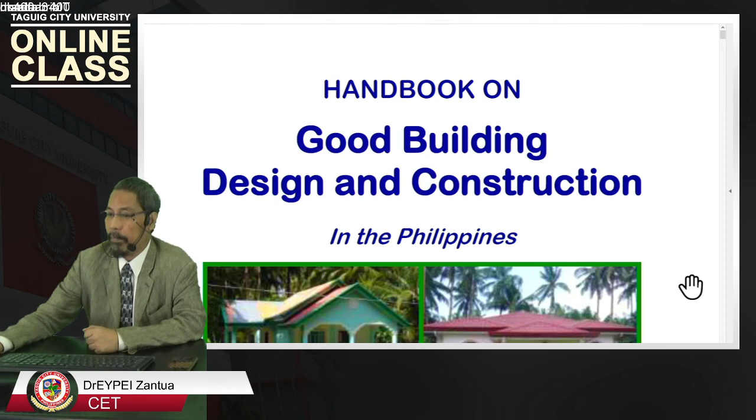Experienced carpenters. Of course, they are not really bad. In fact, they are very experienced in that field, but it is not really thought about or designed in a proper way, and if the residence is good enough, they are oftentimes overdesigned. So we should take a look into this document and present a very current topic about Philippine building design. So let us proceed.

Usually, the majority of our residential units are mainly produced by carpenters, foremen and laborers. They are not thought about or planned. They are not even issued permits sometimes. Much of the time, there's no permit. There's no building permit, no construction permit, no other permit. Just because they are residential, they are the only ones who will suffer if the building collapses.

So in that sense, if the building quality is not good, it is their own pain, their own loss. That's why enforcement is supposed to be done by the government system to enforce the engineering laws of different disciplines. We have the civil engineering law, mechanical engineering law, and electrical engineering law. Those three are the main laws that govern buildings. We also have the plumbing law.

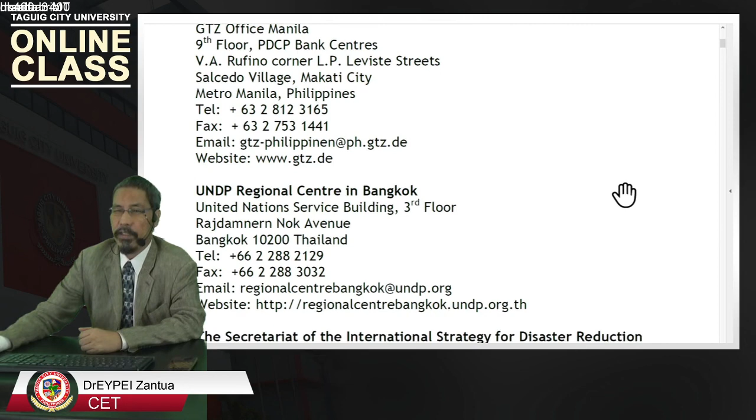This is from funding of the German Technical Cooperation and the United Nations Development Program with the regional center in Bangkok, Thailand, and the International Strategy for Disaster Reduction with their office in Geneva, Switzerland. Their purpose is to provide simple information to house owners, house designers and builders, and building monitors to teach principles of good design and good construction in natural hazard-prone areas.

One of which is actually the Philippines, because we are in the earthquake-prone belt. We are with Taiwan, Indonesia, Malaysia, and Japan as the most earthquake-prone areas.

So also we have natural hazards present in our Philippine environment. So thoroughly studied, they will also guide on whether to repair or rebuild damaged houses. How about those houses which experience some degree of intensity of earthquake? So are we still going to utilize the building, or are we going to rebuild or repair?

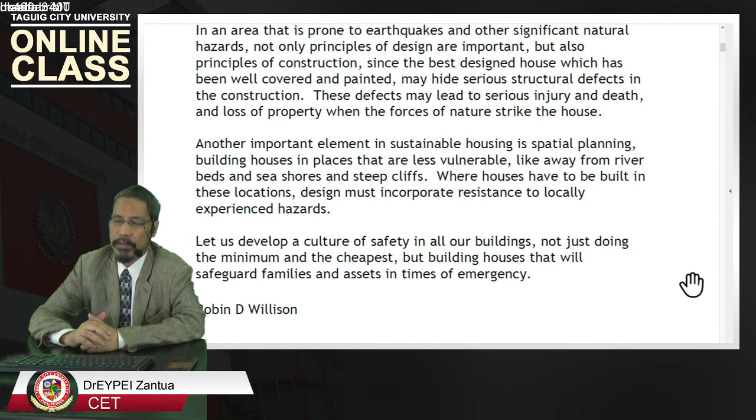Let us develop a culture of safety in our buildings, not just doing the minimum and the cheapest, but building houses that will safeguard families and assets. So this is a word from Robin D. Willison, who actually wrote this handbook. A foreword from the United Nations Development Program with their director, Yiping Zhou.

Okay. It also states the focus on the experience of the Philippines in the course of rebuilding and recovering from the devastation caused by severe flooding and landslide in the past 3 years. So we are always having this periodic, year after year flooding due to typhoons and substantial amount of rains. And how could we cope up? Okay. Is there any hope of coping up with this yearly phenomenon?

As recent events have continued to confirm, disasters upset and negate hard-won development gains. So it's positive development coupled with negative hazard, which happened due to what? Flooding, damaging millions or even billions of properties in a single typhoon or single volcanic eruption.

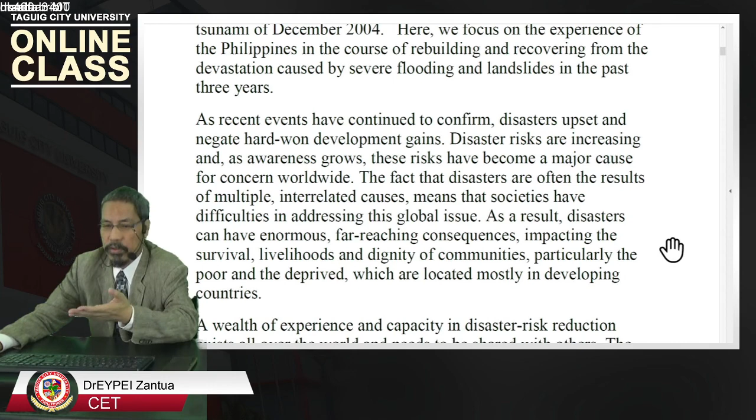Disasters are increasing, and as awareness grows, these risks have become a major cause for concern worldwide. The fact that disasters are often the result of multiple interrelated causes means that societies have difficulties in addressing this global issue. Okay, as a result, disasters can have enormous, far-reaching consequences. We always experience this, in fact, that could change our lives, in countries located mostly in the developing world like us: Indonesia, Vietnam, Laos, Cambodia. So we are similarly situated with respect to that.

And this publication, this document, is a practical guide to design and construction of houses during the reconstruction phase in the aftermath of a disaster. How can we cope up with the repair and reconstruction? So good design knowledge. Okay. The Special Unit for South-South Cooperation supports the sharing of knowledge, expertise, and lessons learned in the past. So these are the background of why we have this advocacy supported by different agencies.

Okay, so specifically, they have the International Strategy for Disaster Reduction. So they already have how to mitigate or lessen the impact of the disaster to the common tao. So also very important, because the Philippines is regularly exposed to climate-related hazards. So let us go further.

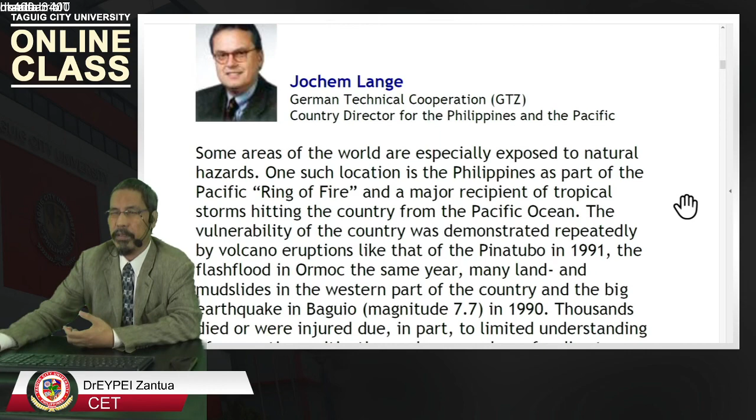One of the proponents also has something to say about the importance of analyzing the hazard carefully. At least some knowledge that we gained in the past, we have to apply in our current situation.

Shelter is a basic human need. A house protects us from climate and animals, and also has a social-cultural role as a center of family life, a manifestation of self-identity. So it is almost a sacred necessity to demand some form of housing unit.

Even as private persons, we are not demanding it from the government, but the government has the responsibility to help us, at least with information, to give us proper guidance on what to know. However, we have this advocacy, which created this book.

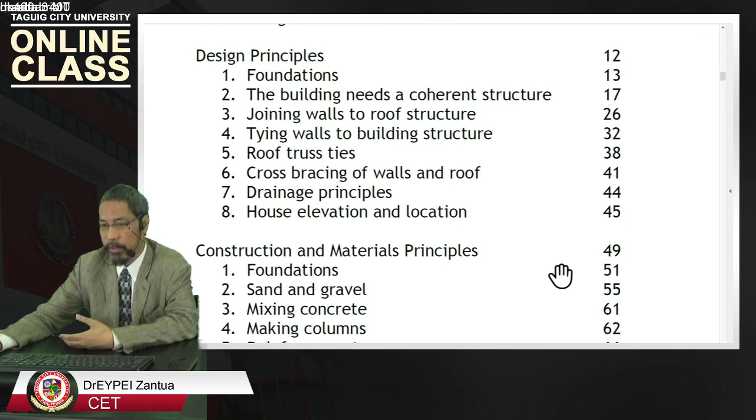So we mainly have design principles, and the other part is construction and materials principles. Let us go to the first part, design principles. What are the concepts we are going to use to meet the cultural, social, physical requirements of residents, to provide safe dwelling, to shelter them from hazards that may impact their environment?

The house must be properly designed, and because of this, the following aspects of a house or structure must be considered in the design.

Firstly, a house must be based on a strong foundation, and therefore this must be given primary attention. Problems with foundations not properly designed lead to unequal settlement. This is a concept we learned in geotechnical engineering. We know how to compute this, we know how to estimate this.

And therefore we give this to the local experts. Cracking of walls and floors and structural weakness are examples of the results of uneven settlement.

So one of the simple ideas is to have a house with a coherent and simple structure so that it could resist outside forces. Not a complex one, simple - like if you put up a single stone, because it is so simple, it is very hard to damage, hard to crack because of its simple structure. So as simple as possible will give us better resistance to forces.

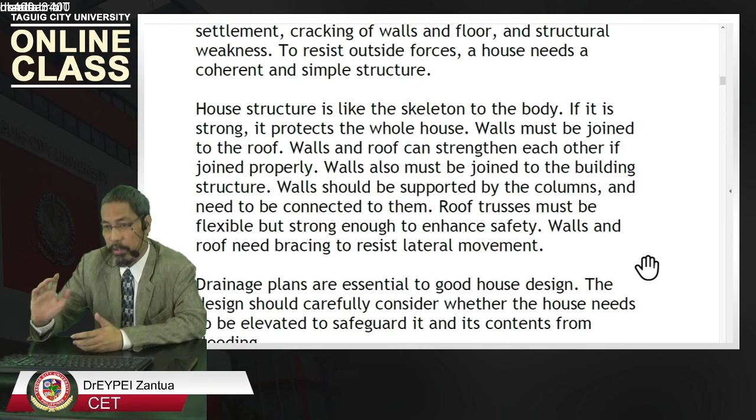So in addition to walls and roof, their main structural elements should need bracing. So we'll go to that - another, the second one, main...

The third one is drainage plans, which are essential to good house design. Drainage is sanitary, to protect us from biological hazards that could lead to sickness and illness. So, drainage plans are essential.

The design should carefully consider whether the house needs to be elevated to safeguard it and its contents from flooding, because floods carry bacteria, and bacteria would expose us to dangers.

So we already gave you three design principles, and let's look at our detailed topics, starting with foundation. So if we can get back to that - that is the first aspect, foundation. Then the second one is house structure. Then the third one is drainage.

So we are now going into deeper details under the foundation. A safe house must have a strong foundation. That is the concept. The ground under the building has to bear the weight of the house. It has to have the soil prepared so that the foundation must be made stronger.

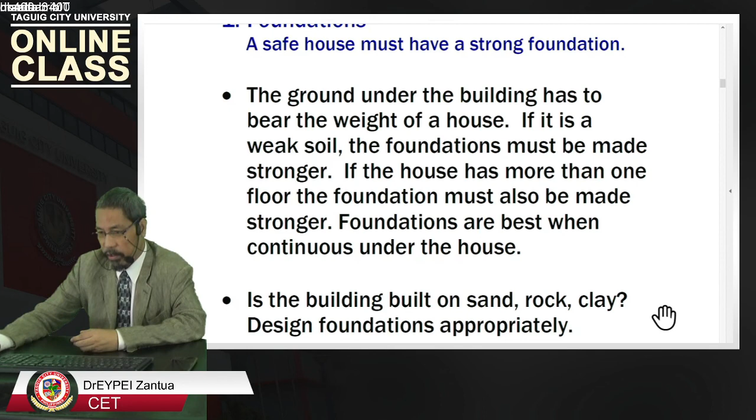Okay? Why? Because as we have said, the house is the load on the soil. So the soil will support the weight of the whole house. So we should be able to prepare the soil for this load. Okay? Foundations are best when continuous under the house.

If they are continuous - because there are foundations that are isolated, but they are best when continuous under the house. There are several types of foundation systems, and one of which, according to our practice and experience, it is best when continuous type of foundations are used.

Is the building built on sand, rock, or clay? So those are the things that we need to see, to observe, look upon during our visual survey of the area - sandy soil, rocky soil, or clay. What is the best type of soil out there?

And if the soil needs to have dumping of appropriate layers of elements like gravel, sand, and so on, we might need additional soil coming out from other areas and delivered to the site, for appropriate design. So we have to estimate soil for a good foundation that can carry the weight of

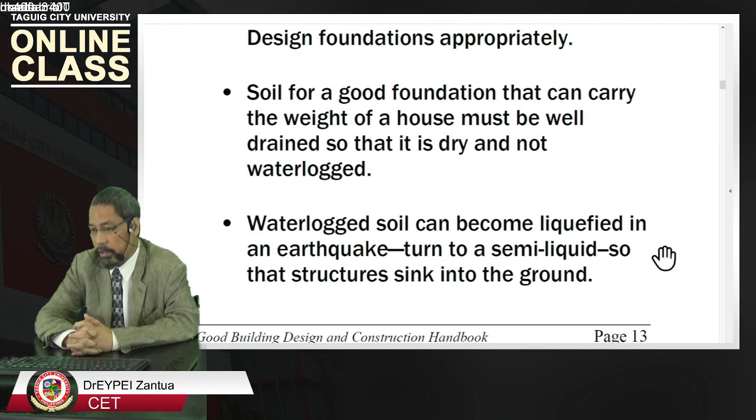And if the soil under your building flows, your building will flow with it, turning to a semi-liquid so that the structure sinks into the ground. So that's a very critical problem. One, two, three, four.

So in here, we are looking at the area, if this is now appropriate for building construction. So it is not. It is not a good example because of bad foundation. This house is being built in a swampy, waterlogged area.

Waterclogged - this is misspelled, spelling's wrong. No? Waterclogged area, okay? So we have water clogging here. So meaning the soil is not prepared.

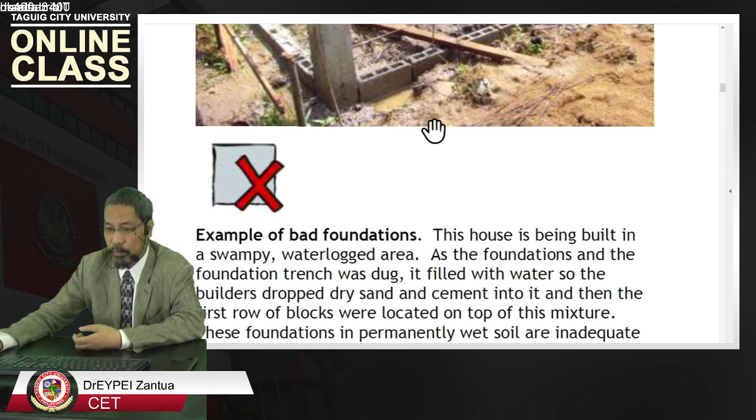will support. If the soil is not good enough to support the building, what will happen? It is really a bad foundation. As the foundation trench was dug, it filled with water, so the builders dropped dry sand and cement into it, and then the first row of blocks were located on top of this mixture.

We usually see this in real life. This is what we see, how laborers and carpenters do it. They do not know. They do not have an idea that they are doing badly in this regard. Okay? Why? Because they just copy their bad experience. That's why.

Number of years of experience is not the question. The question is, how good is your experience? For example, you have 2 years of very good experience against 30 years of bad experience. I may pick the 2 years of good experience rather than 30 years of doing the wrong thing. Having 30 years of doing the wrong thing is not a good experience. Okay? So it is not the longer you work on the field, it is not the longer you work on the construction site - it is how effective your work on the construction site is.

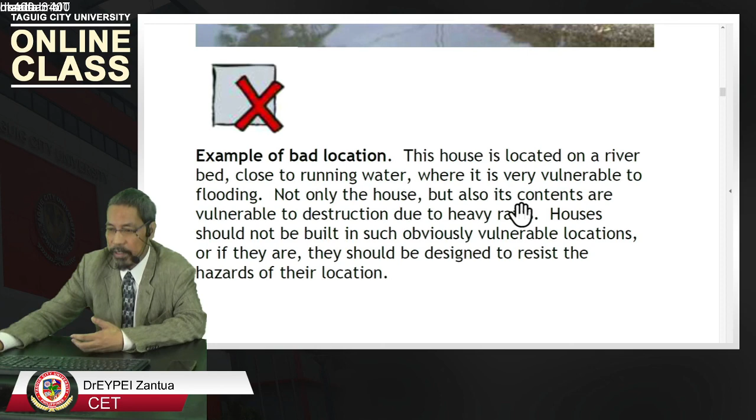Okay? Whatever it is. For example, agricultural produce of how many kabans of rice. For example, 50 kabans of rice is a pricey thing to be damaged by a single flooding. So, it's a painful loss to the owners if that so happens.

Houses should not be built in such obviously vulnerable locations. However, we are always building those types of houses in those types of locations. They should be designed to resist hazard in their location, but on the very first place, we are building our house in that hazardous location.

We could build a house in some areas in the upper portion of the land, outside the reach of water level, the maximum water level, not within reach of a hazardous water level. So, if you have one whole year of experience, or ten whole years of experience within that area, you will have an appropriate knowledge of what is the water level during the dangerous times. And that water level should be your basis in order to select the location of your house.

That's another bad example. The previous one is for foundation, which can be corrected. This one could also be corrected by dumping a sufficient amount of soil before building a house on top of it. Houses should not be built in such obviously vulnerable locations. Okay, and the next one, we have this example.

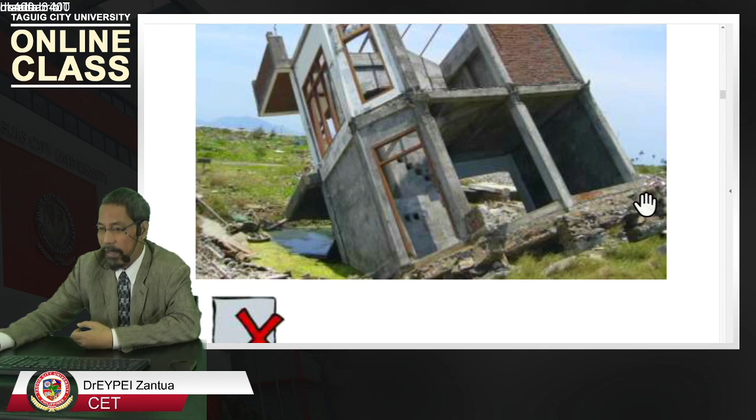In a two-story house or building, this is affected by uneven or unbalanced settlement. That is an obvious result. How can you now correct this? More or less, you cannot repair this anymore. And how much is the loss? All of the materials lost. How can you repair this?

It could be, it is still possible engineering-wise, but the solution might be expensive enough that you would even decide to build a new one.

Liquefaction under the ground, meaning sudden exposure of the underground soil into hazardous earthquake effect. So the foundation suffered from liquefaction, and therefore the ground will be affected, not symmetrical to your building, but unbalanced, and would subside unevenly to the ground. So that's why, for example, only one column was affected by the liquefaction, then it will tilt. Okay, so that's why we have a bad example of number one.

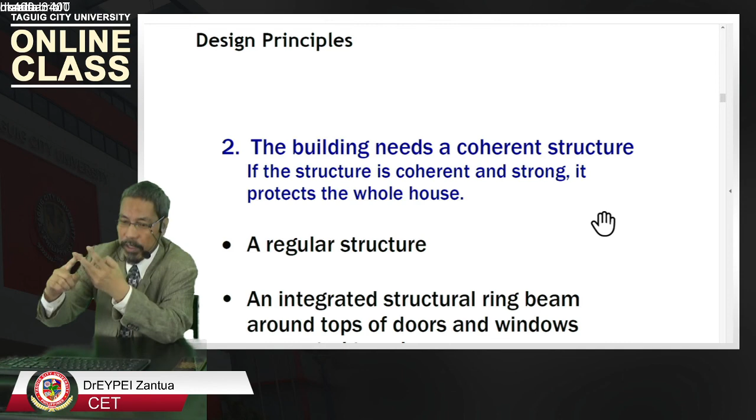Number 2 is coherent structure must be there. Regular structure, integrated structural ring beams around tops of doors and windows connected to columns. So, there must be proper transfer of loading around and among your structural elements. An integrated structural ring beam around top of walls connected to columns. So, beforehand we have doors, windows, now walls. Triangular gable end walls must be structurally supported.

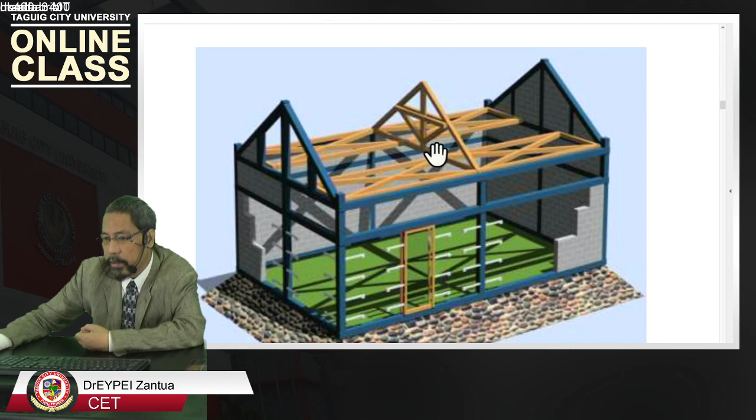Going to the columns, and also the trusses supported by beams. Okay. So, let us take a look. This is also a good structural design. Take note, hollow blocks or brick wall with reinforced concrete structure. So those protruding parts are what we call reinforcement.

A complete structural frame around the building is tied into the foundation. So you will notice that. Tied to the foundation. We have the foundation here. This is what we call tie beam. This tie beam is also a form of foundation, because it is connected to the footings below the surface of the ground. So these are the reinforcement, and the connection, complete, full connection. So good structural design.

The top of the walls is also tied together with the columns, and by a second reinforced concrete ring beam. Okay, so what is this? This is the second reinforced concrete ring beam. This one. This is the first, the second, before we go into the roofing. This would support the doors and the windows also.

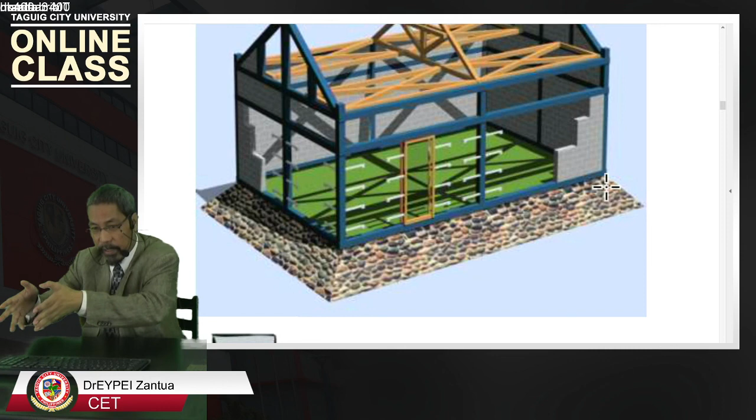Doors and windows have a beam over them to carry the weight of the wall above and to strengthen the columns. That is one way of doing it. Sometimes in the Philippines, we do not utilize this because beams and columns are very expensive. If you recall the previous slide, we have the foundation, which immediately proceeds with hollow blocks. So we are better if we use this tie beam.

And also, above the doors, we have another beam that would support this space. In the Philippines, there is no such type of beam. Almost always, 90% of the time, particularly in residential areas, even in this building, you will not see a beam above the doors or the windows. We are just using lintel in the Philippines.

A complete structural frame around the building is tied to the foundation, the walls, and the roof structure. So, very good. Let's go to the next.

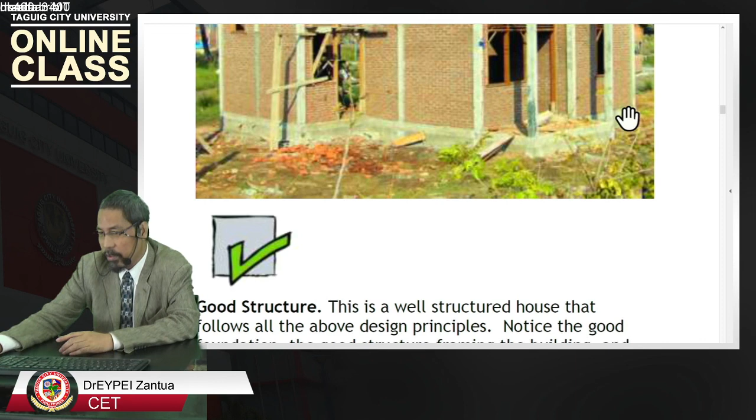Notice the good foundation. This is part of the foundation. These tie beams are part of the foundation. The good structure framing the building and the two ring beams connecting all the building elements at the top of doors and windows and at the top of the walls.

Two ring beams. So we have ring beams here at the top, but this is also a ring beam if you look from above. Even though they are not at the same height, it doesn't matter because they are tied at the column, at different heights. And also take note, they are not substantially apart from each other. They are near each other. So it's still a good design.

It is not as if they are 1 meter apart from each other. That is not good, no? However, in this case, for example, here, this is 1 meter up to that point. This is 1 meter up to that point. That's why he made another beam in between.

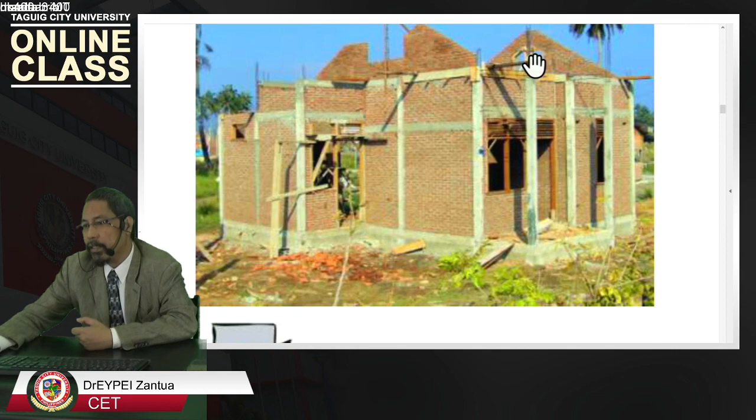Gable end walls are also strengthened with reinforced concrete. So here we can see this is going to be gable, that is reinforced concrete, gable roof. So we have steel reinforcement like this. Okay. So we also notice that. So that is necessary.

It will not be damaged like this one. This will be damaged one panel, one wall at a time. However, this will be damaged completely. This will be completely shattered because they are dependent on each other. If this part is damaged, all of the upper part will be damaged.

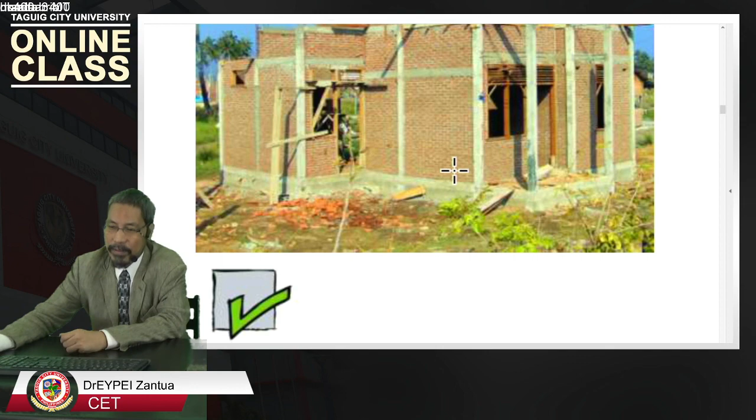It is not the same. If we take a look at here, if this part is damaged, all of the upper part is not damaged because they are connected to the beam and column. Only that small part will be damaged. That is the difference. So take note of that.

Actually, they are not poured. Maybe they are just made up by throwing the mixture of sand, gravel, and cement after the walls were built up, because this is a common issue with carpenters and laborers, because we would like to minimize the cost of building a form. So you have to build a form before you can pour the mixture of concrete.

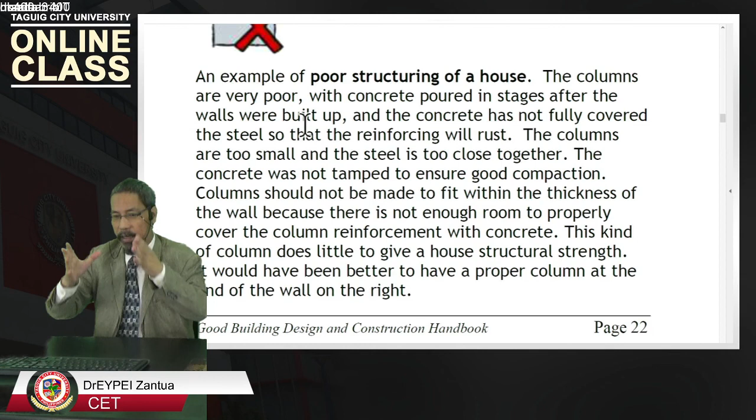Not just on the issue of money, but on the issue of the complicated job that must be done in forming complicated forms. You don't have to form complicated forms like this one, because you just need one plate inside and one plate outside, then pour, because in between there are hollow blocks. And look at the hollow blocks like this. It's not a properly made up wall.

It's not fully covered the steel, so the reinforcing will rust. The columns are too small and the steel is too close together. Take note, the steel are too close together. It's not good practice, okay? The steel should be farther away from the center of the column. That is a main principle. Okay?

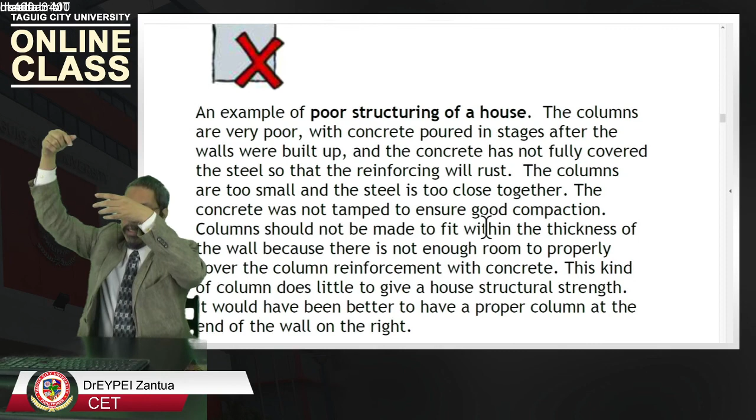The concrete was not tamped to ensure good compaction. So tamping: after pouring in the mixture of concrete, while it is still wet, you have to tamp it by a small stick, long but small stick, so that we can avoid bubbles. Okay? Bubbles. There are the trapped air bubbles inside that created those bad column structure.

Columns should not be made to fit within the thickness of the wall because there is not enough room to properly cover the column reinforcement with concrete. Okay. Columns should not be made to fit within the thickness of the wall. Okay. So, it is just what? Rushing of work. So maybe the foreman or the carpenter is not aware, or if he is aware, he still does it in order to avoid what? Long period of work. Okay?

This kind of column does little to give a house structural strength. It would have been better to have a proper column at the end of the wall on the right. Okay? The end of the wall here, this one. You should have a column here rather than here. So it's not proper. It's not properly designed.

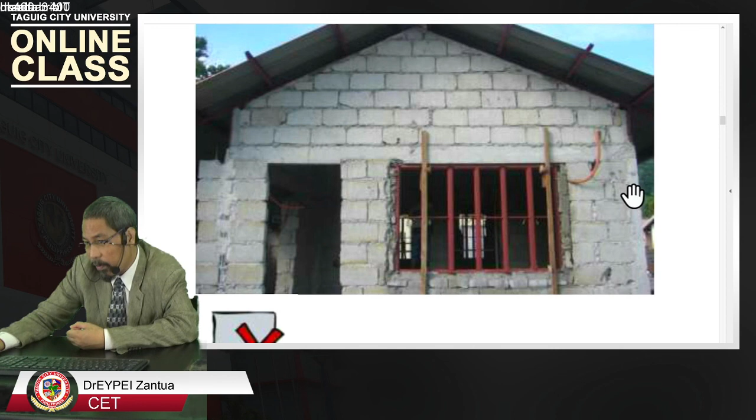Almost similar. Small column, but another one. The column here is not sufficient. Not sufficient. We need column here. Okay to have beam here, but there is no connection. This is just a lintel again. This is the practice, normal practice in the Philippines. This is not good structure.

Another example of house which has too little structure to brace the wall against lateral forces. This is a common construction fault with hollow blocks. Columns are inadequate, too small and poorly constructed, and there should be a reinforced column between the door and the window. So here, we might have some column here or here. Because if we do not have, they will fall at the same time. That's the reason.

The window and the door have inadequate structural support. When the forces of nature strike this house, it will progressively deteriorate and be hard to repair. It is harder to repair.

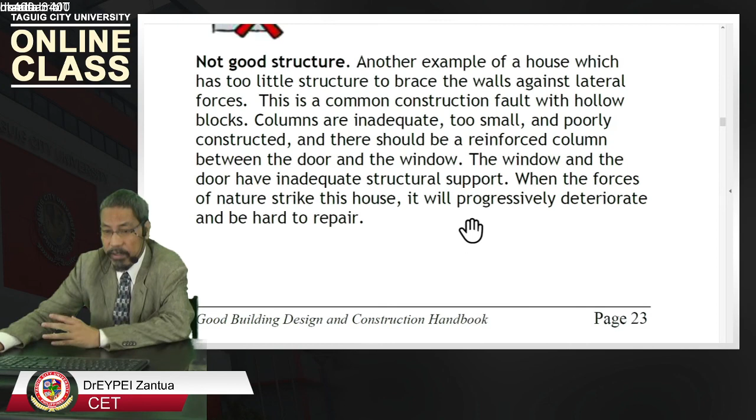A good pattern of reinforced concrete columns and beams to strengthen all aspects of the building, including support to strengthen the triangular gable wall, end wall, so that it will not fall when the lateral force strikes the building. That is usually the weakest point. They will fall down. So structurally supported with beam here, with beam here.

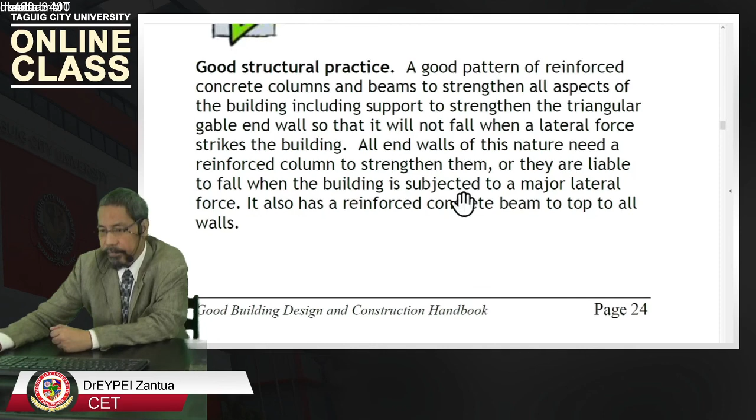All end walls of this nature need a reinforced column to strengthen them, or they are liable to fall when the building is subjected to a major lateral force. It also has a reinforced concrete beam to tie all walls. Okay, so that is good. So we have beam here, actually we have beam here. Complete. Completely okay. A good structural practice.

Connection of wood frame building to concrete frame or brick stub walls. So this type of connection, on our timber design. Steel framing, steel bracket that could be used to support our columns and become a what? Footings, foundation. Okay, so that is what supports our stub walls.

It is essential that a wood frame structure mounted on a concrete frame brick stub wall must be fully anchored together. So, fully anchored. So have a full anchorage here. So, letter Y and footings. Steel bracket. Okay? So, because this is a timber, we are going to have a bolted timber system. Okay?

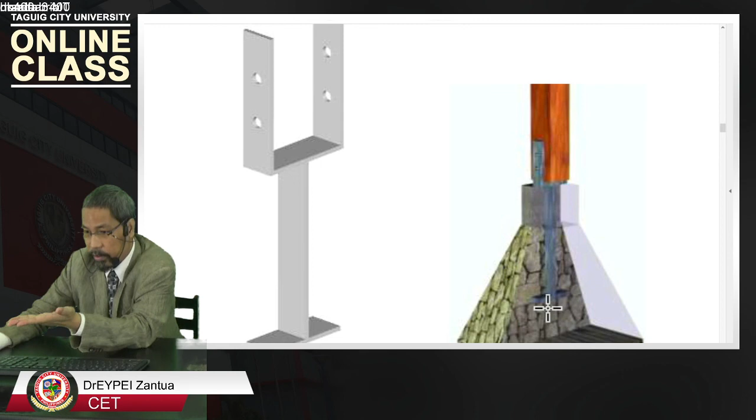So this will support the wall, meaning the wall will transfer the load to this column, and this column will transfer the load to the earth by this foundation. And this is obvious that this will happen. It's obvious, okay? So it is a good sample.

Design principles, number 3. Joining walls to roof structure, join walls to each other. Column reinforcement should protrude from top of concrete columns and be bent around roof trusses for structural strength. So the reinforcement should be bent around and be strengthened. Or roof trusses should be strapped with metal ties to the wall structure. It could be strapped or bent around. Okay? Strap. So strapping with the metal ties to the wall structure.

Okay? Exposed metal from the column should protrude from it. So that is for what? For stronger connection. For what? Complete transfer of load from trusses, roofings to the column. Exposed metal should be painted with rust-proof paint to prevent corrosion. So because of the bent exposed metal, you have to give some painting to avoid immediate corrosion.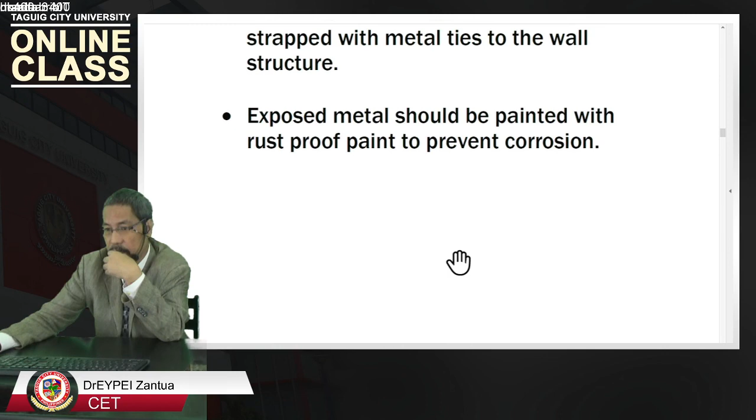Okay, let us go to the picture example. So this is what we call a strap. So these trusses are strapped. So this one member of truss is connected to the other member of truss. So they are stable enough because they form the basic stable geometric configuration, which is triangle, and strapped to the column. And this beam has a protrusion to be connected to the succeeding element. Also this one, okay?

Illustration of binding roof trusses to building structure. Roof trusses should be constructed over columns, and for a concrete column, the reinforcement should protrude at the top and be bent over to join the roof structure with the walls. So, metal straps. Metal straps is the alternative way of doing it. Metal straps or plates can be used for this role, particularly where building structure is made of wood. So that's why they are looking like that, no?

Made of wood. Another example, bent. The reinforced protrusions are bent over. So with what? Bracket. Okay? With bracket here, in joining the truss elements. So good example, roofing sample. Reinforcement bent over roof truss to tie house structure to the roof structure. This is an essential detail in areas subject to earthquake and winds to keep the roof on the house when the natural hazard strikes the structure.

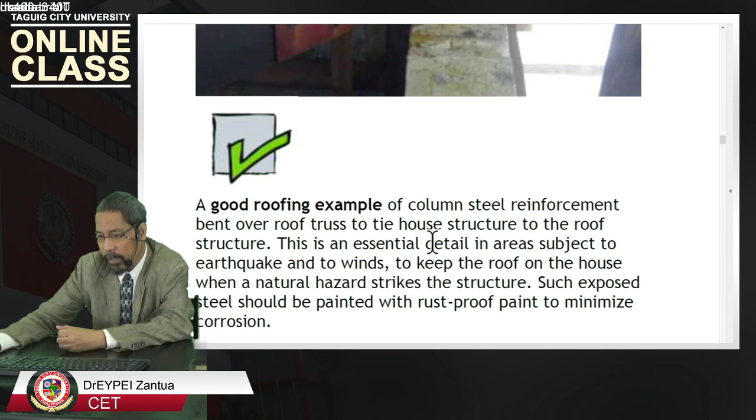Such exposed steel should be painted with rust-proof paint to minimize corrosion. That's why you are now looking at some of the rusting. So immediately paint it with enamel painting for initial paint protection.

Another example we have here, steel trusses connected to concrete beams and columns. So what did they do? What did they do? They have protruding reinforcement. I do not see the bending, but they have a good protruding reinforcement. Good roofing practice, steel roof trusses are connected to columns through welding. Welded. I did not see the welding. No? So welded connection of truss members to column reinforcing steel. And purlins are welded with ties to roof trusses.

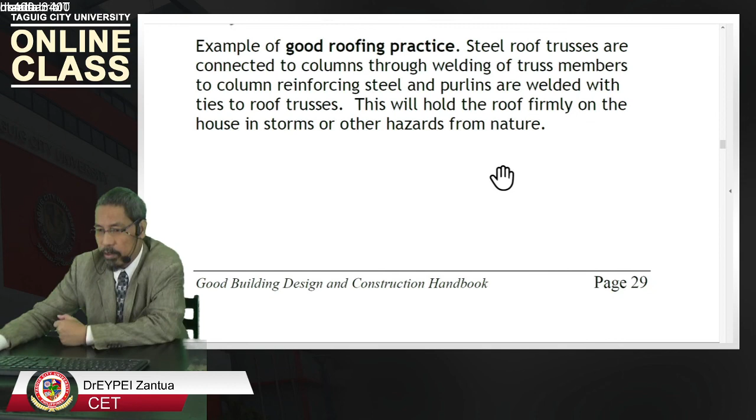Okay. So welding by welding technology. So that's one. Welded. Okay. This will hold the roof firmly on the house in storms or other hazards from nature.

Next picture, we have a connection. So there is no bending. Why? Why there is no bending? So this is incorrect roofing practice. There is no bending or protrusion of reinforcement between the roof and the building structure. The roof is resting on the top, so it could easily be blown away by strong winds, subject to moving with high winds and other forces of nature. So it's not a good principle.

So another design principle, which became number 4 here, tying walls to building structure: walls tied to columns protect them from falling. Tie the walls to building structure. Okay? Walls tied to columns protect them from falling. Walls must be tied so they do not move separately when the forces of nature impact them. Wall ties should be hooked into the wall structure.

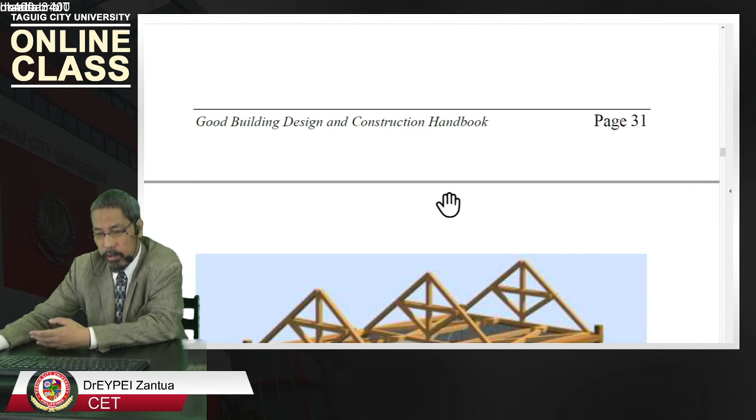Hook. Hook looks like this. Okay? Hook. So we have like this, a small hook. Okay? There are small hooks there. Okay? So good tying practice and illustration for a wood frame building where metal ties are used to tie wall materials to the main structure of the building.

The steel wall ties are to be at maximum of 40 centimeter spacing. Maximum. So the distance of this one to this one, that is what he is talking about. Maximum of 40 centimeters. So 40 centimeters is about 1.5 feet. Less than 1.5 feet. Okay.

Okay. So we have the same. They are the same. They are the same.

40 centimeter. Reinforced where metal ties are used to tie the walls. Steel wall ties are to be maximum 40 centimeter, a minimum of 8 mm diameter. So the size is 8 mm, and bent at the end. They are for all openings in the walls. So 8 mm minimum. That is used in the Philippines.

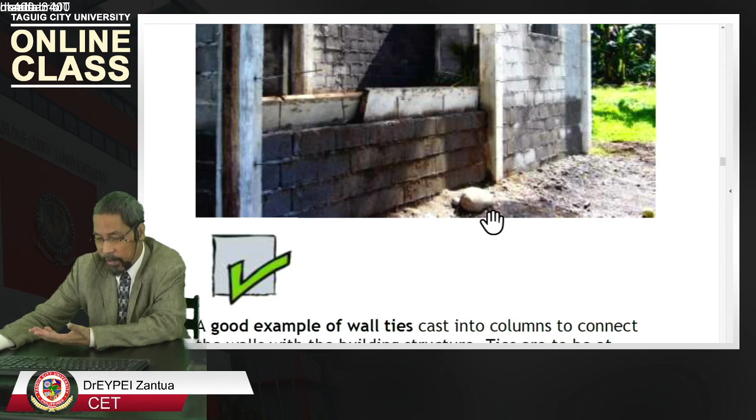So this distance from this point to this point to this point, maximum 40 centimeters. And they are sized number 8, or 8 mm rather. Good example of wall ties. Yeah, wall ties. So these are the wall ties. So wall ties, okay.

Cast into columns to connect the walls with the building structure. Ties are to be at maximum, again, from bottom to top of the wall. However, in this illustration, they lack hooks at the ends at this point in construction. So, there should be a hook shape. Okay? Like this, small hook. Small hook shape. Okay? So, we do not see a hook shape here.

Okay, so also top or bottom. This 1, 2, 3, 4. Okay. We should also have above going down. Okay. So to top of the wall. From bottom to top of the wall. Okay, going up. Must be connected there.

And okay, what happened here? Result of no ties. Okay, so the wall and column just separate. The beam and the wall just separate. Yeah, there is no connection between the wall and the beam. They just separate.

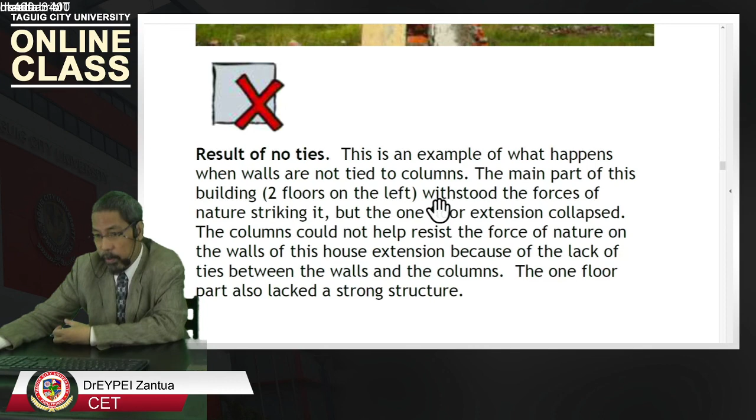Okay? The main parts of this building withstood the forces of nature striking it, but the one floor extension collapsed. Okay? So the extension, wall extension collapsed. Okay? The columns could not help resist the force of nature on the walls for this house extension because of the lack of ties between the walls and columns.

The one floor part also lacked the strong structure. So it's not a good practice. You can see there is no reinforcement in between connecting the column to the wall. So we have the reinforcement shown here, but there is no connection from the wall. So they just separate from each other. Result of lack of ties.

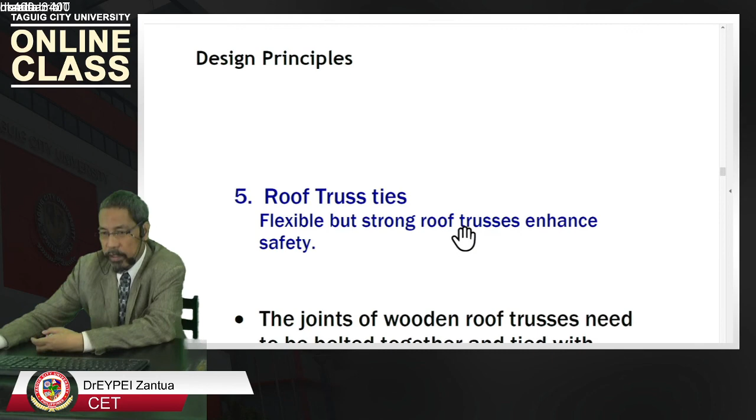Design principle number 5. Roof truss ties are also needed to enhance safety. Joints of wooden roof truss need to be bolted together and tied with metal straps to provide flexibility but not collapse under the forces of nature. Metal roof trusses must be welded together, welded to purlins and welded to wall reinforcement for strength. Okay? So that is the difference between wooden and metal. Okay?

Welding technology and bolts. Okay? So it's easier for welding, but the technology needs what? Equipment, welding equipment, and skill and power source. Okay. However, for wood, we just need to prepare bolts and holes, okay, and metal straps. Okay. So let us take a look. So wood, bolts, and metal straps like this, brackets. Okay, good.

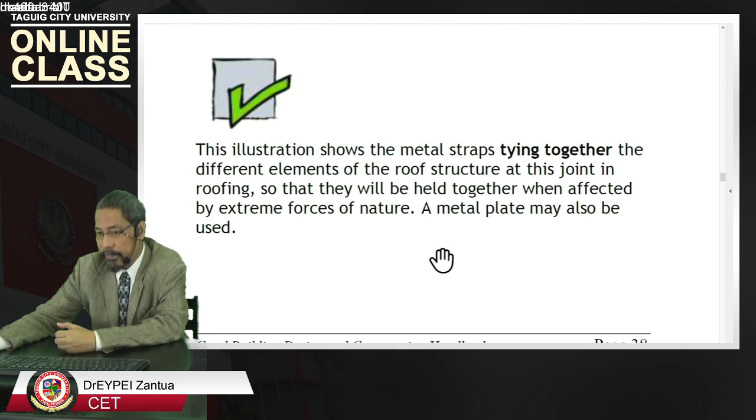Straps tying together the different elements of the roof structure and at this joint in roofing so that they will be held together when affected by extreme forces of nature. It could be a metal plate like this, a triangular metal plate could be used like this. Also, a triangular metal plate could be like this. Okay. Also here, a triangular metal plate could be used like this. Also in here, also in here.

So, another illustration of a good joining practice. Notice that for a wooden roof structure, wooden blocks should be used for support of purlins, not a single nail through the purlins into the truss. Okay. It's better to have that kind of support using wooden blocks rather than nailing. But, however, the natural and normal practice in the Philippines, again, is through nails. Okay? That is a carpenter and laborer type of experience.

No? Strap, plate across joint. Okay? Okay. So, there are no nails. Just bolts, no? You have bolts, pins, or even nails passing through this metal strap or plate.

How about steel connection? There is so much welding. The roof is strongly connected to the reinforcing wall by welding, and the purlins are welded to the roof trusses.

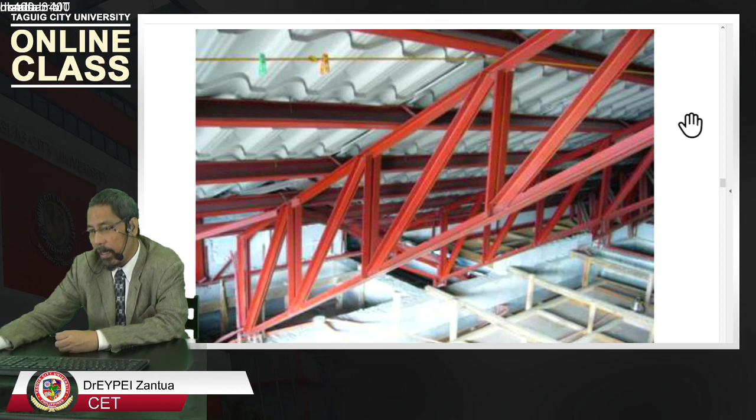So what are the purlins? These are the purlins, welded here to the roof trusses with small U-type brackets made up of reinforcing bars, to make a strong roof structure.

Principle number 6: cross-bracing of walls and roof. We need cross-bracing to avoid being susceptible to lateral damage. In order to resist lateral forces, walls and roof structures need cross-bracing at all levels, particularly if it is a wooden structure. This is a major principle in construction of traditional houses. If it is concrete, the concrete blocks themselves form the cross bracing.

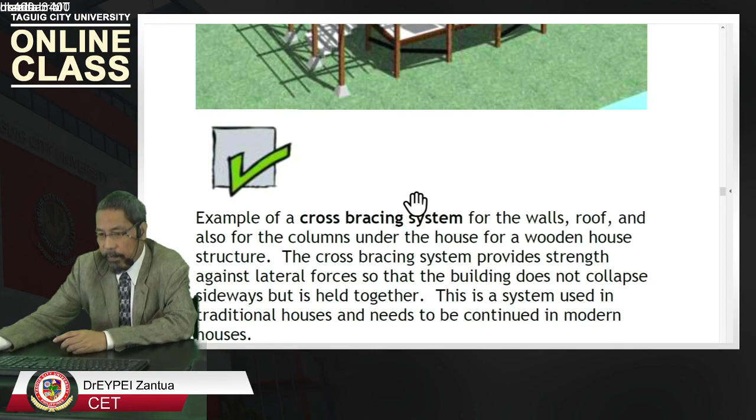Example of cross bracing system for walls and roof. Cross bracing one, another cross, a full cross, one diagonal which is also called the cross. Another cross bracing here, another cross bracing here. Take note of the formation of the cross bracing - this one, this one, this one. So those are the types of cross bracing.

Minimum, but effective. So for columns, walls, roof, under the house for a wooden structure, the cross-bracing system provides strength against lateral forces. This is a system used in traditional houses and needs to be continued in modern houses.

What is this? This is an old house, I think in the northern part of the Philippines. So we have what? It's very hard to believe that this will survive. Maybe it is a very thick wall, so it may survive - but there is no bracing.

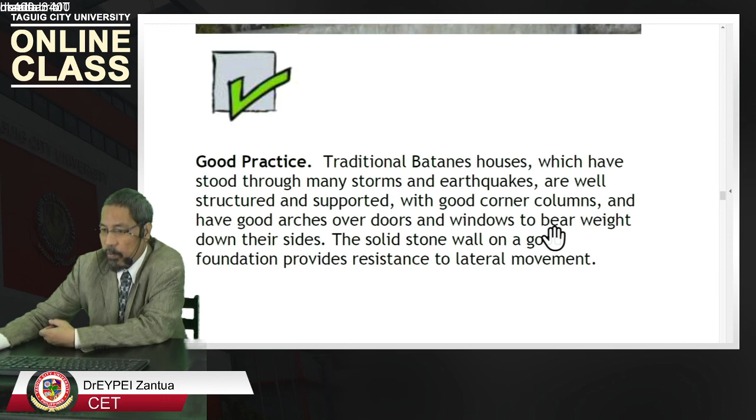And they have good arches over doors and windows to bear weight down their sides. There is no beam, but the arch provides the transfer of load from horizontal to vertical. That is the function of an arch - it provides the connection, the transfer of loading. That's why it is still good.

This is good - a solid stone wall on a good foundation provides resistance. That's why, because of foundation and structure, even the stone wall is enough. And it is not just maybe, because these houses already are tested for a long period of time - they are still there through many typhoons.

Okay, number 7, we are nearing the end of the document. Drainage principle - that is the last topic. Drainage plans are essential to good use. A high rainfall area requires a drainage plan for roof water to a common drain.

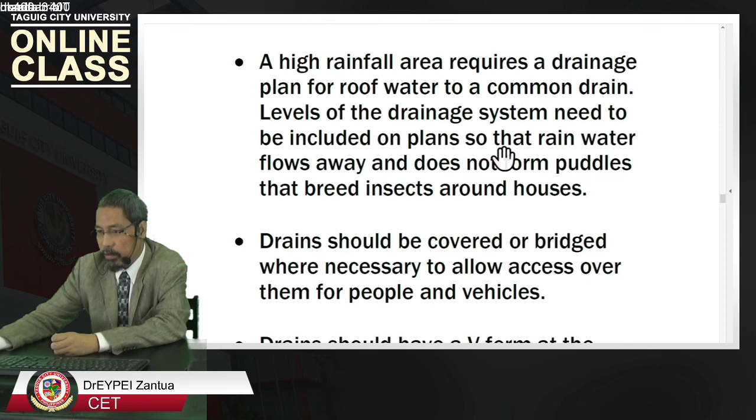So there must be a proper assessment of how the water should flow. Levels of the drainage system need to be included in the plan so that rainwater flows away and does not form puddles near the foundation, which bred insects - another health hazard, biological, from houses, so sanitary in nature.

That's why drainage is under sanitary or plumbing, because plumbing is an essential part of structure. What are the very simple essential parts? Structural, plumbing, electrical - those three are the most essential parts. With just those three, we can build a simple basic house.

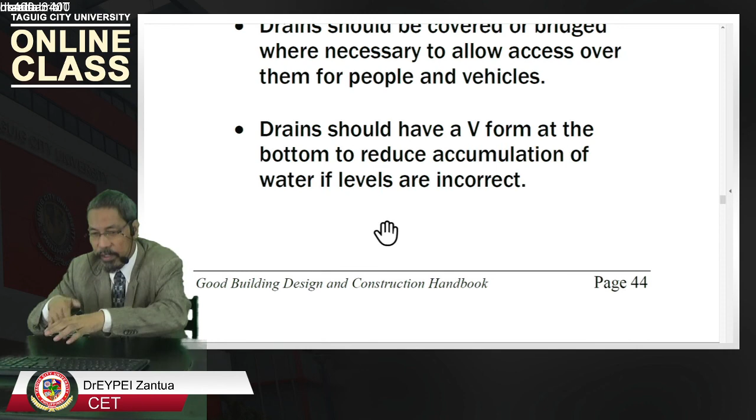Drains should be covered or bridged where necessary to allow access over them for people and vehicles, so there should be a pathway for people not to step on the drain system every day. Drains should have a V form at the bottom to reduce accumulation of water if levels are incorrect - a V type of canal.

Design principles: house elevation and location safeguards house and contents from flooding, landslide, and floods. Selection of location: the house floor should be elevated above the surrounding ground level, and extra height is needed in vulnerable situations such as location close to a floodable waterway or swampy area, or in a tsunami or wave-prone area near the sea.

Extra height is best provided through stilts, so bamboo stilts is okay. We can see on the pictures.

Houses must be located away from places subject to landslide, where soil may move down a steep slope, and debris flows where soil, gravel, and rocks may be washed rapidly down by heavy rainfall plus floods.

Okay, let's take a look. In a swampy area, we need to have a first floor above the ground level. That's why we have footings here, and they are constructing the floor beam. So the floor is going to be about 1 meter above the ground.

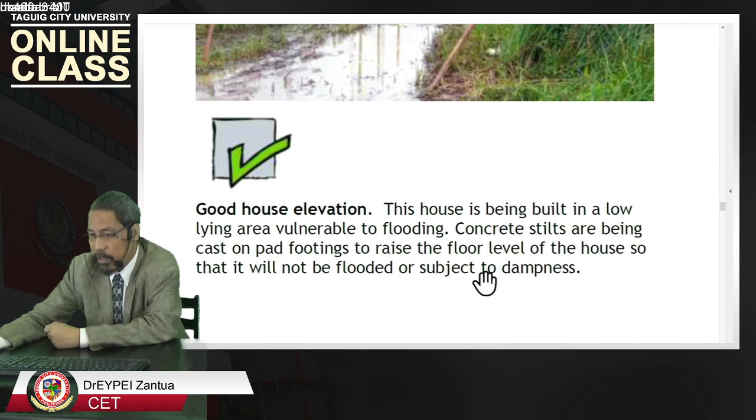House elevation. This house is being built in a low-lying area, vulnerable to flooding. That's why concrete stilts are being cast on pad footings to raise the floor level of the house so that it will not be flooded or subjected to dampness. So these are the concrete stilts.

So casted on footings, pad type of footings, individual type. But we also have floor beam. It's enough to support because there is only one, about or less than 1 meter. So that is enough.

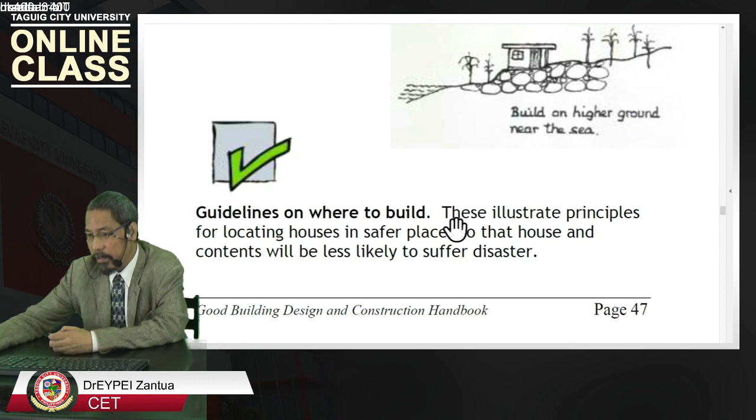Guidelines on where to build. This illustrates principles for locating houses in safer places so that the house and contents will be less likely to suffer disaster. Here's another picture, in landslide areas.

Over riverbeds or irrigation ditches, you have to provide a strong column. Over sanitary waste, landfills, or construction clearings, you have to do it with a deep type of foundation.

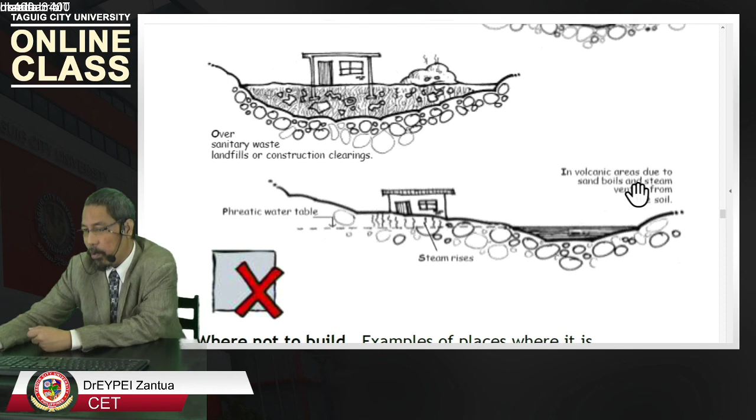Phreatic water table - so we have the phreatic water table here, and steam rises, so it's not good. In volcanic areas, due to sand boils and steam venting from the soil, it's not good, we are not to build there.

Sample of places where it is dangerous and where it is not dangerous to build, where houses may easily be destroyed. So that's why you should not proceed like this - you are within the maximum, you are here, this may erode, the soil is not stable.

That is why those are construction principles and materials. So we are now on this part: a building may incorporate all good design principles, and yet the way it is constructed may lead to its failure when the forces of nature are applied to it. This section explains good construction methods and principles for choosing good materials for construction.

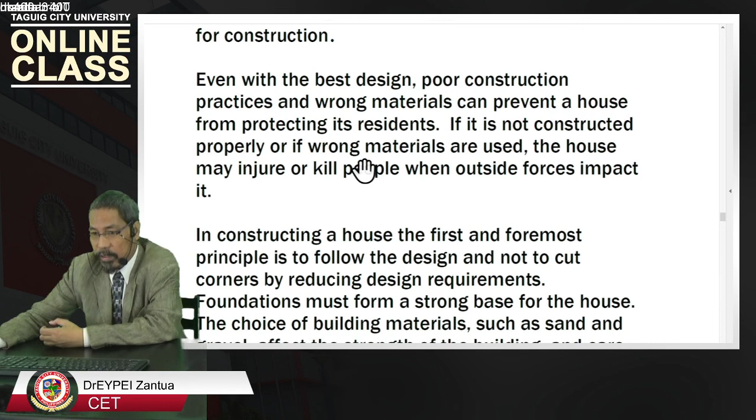Even with the best design, poor construction practices and wrong materials can prevent the house from protecting its residents. If it is not constructed properly or wrong materials are used, the house may injure or kill people when outside forces impact it.

In constructing a house, the first and foremost principle is to follow the design and not cut corners by reducing design requirements. That is happening all the time. The choice of building materials such as sand and gravel affects the strength of the building, and care must be taken to choose the best materials.

Mixing good, clean ingredients with little water makes strong concrete. Wrong ingredients seriously weaken concrete. Strong columns provide strength to the structure, forming part of the principle to use the best materials in order to keep everything and everyone safe. A strong roof provides lasting weather protection, and tying walls to the structure strengthens them from collapse in an emergency.

Wells and septic tanks are essential health-supporting components for the plumbing and sanitary system of a house, and therefore must be planned wisely. You have to place those at a distance from other water sources and the septic tank. The foundation material principle must be founded on solid ground.

Only broken rock should be used in the foundation, not unbroken, rounded river stones. Because they are broken, they are not slippery - they pose sufficient friction.

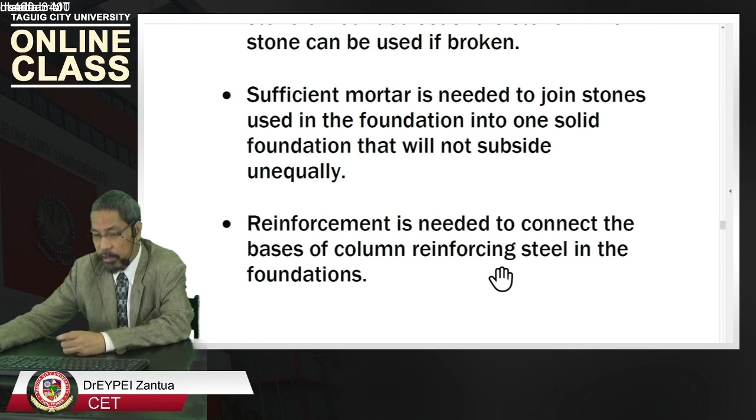Reinforcement is needed to connect the bases of columns, using reinforcing steel in the foundation. There must be a connection from the foundation and footings to the column itself, because of the need to transfer the load more efficiently from the column to the ground.

Good material for foundation is broken rock, rather than unbroken rocks. This material is of a harder rock or sufficiently large size so that rocks will not slip between each other, providing sufficient friction. If it is properly laid and properly cemented with the column starter concreted into it, it will make a good foundation.

Poor material for foundation includes round river or beach rocks, which do not pose as much friction with each other because they are liable to slip between one another, causing them to settle unevenly.

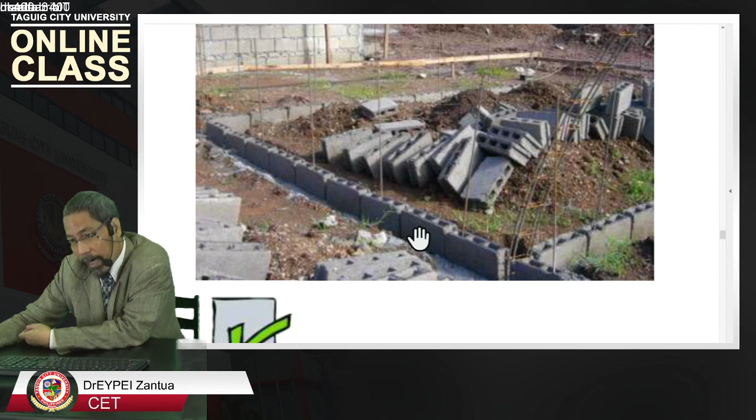Let us go to the next foundation - a good concrete foundation, below the hollow blocks, with reinforcement. These houses have been constructed in a dry trench, so there is no flooding and no clogged water.

Using good material, the first row of blocks was laid while the concrete was still wet. Starter bars to reinforce the hollow block walls are inserted while the concrete is wet, giving us the footings and wall hollow blocks.

Regarding construction sand and gravel: coral sand should never be used in any construction. Coarse sand should be sieved to remove stones, fine particles, and dust, following a design range of sand size.

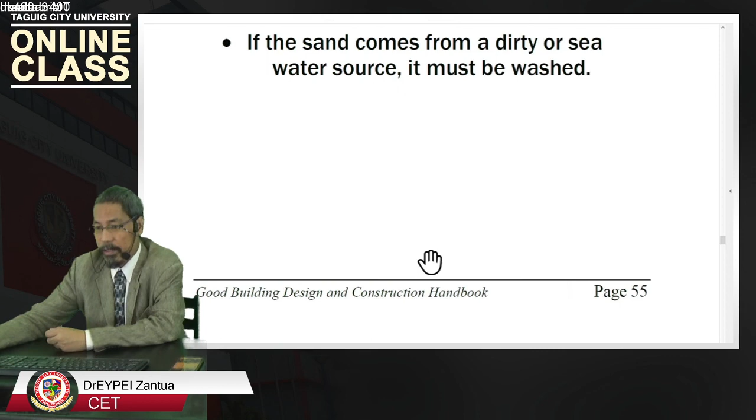Good quality sand is all of about the same coarse texture and does not have larger stones in it or a lot of dust.

Sand can be tested by lifting up a handful and letting it fall back to the ground. If a significant portion of it blows away instead of falling straight down, it has too much dust and needs to be sieved - that is how we do it in the construction site.

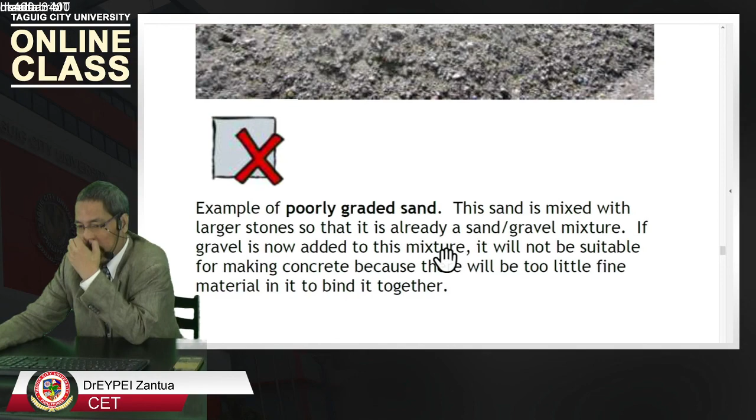Here is an example of poorly graded sand - a mixture of small stone and sand, mixed with large stone so it is already a sand-gravel mixture. If gravel is now added to this mixture, it will not be suitable for making concrete because there will be too little fine material to bind it together, so it will not properly provide the correct proportion since it is already mixed up with the sand.

Okay. Bad practice for materials. Debris should not be allowed to be mixed with any of the ingredients for making concrete. Such debris seriously weakens the strength of the concrete. This sand will need to be cleaned before it is used for mixing into concrete. So there are what? Waste, garbage with the sand.

So plastic, leaves, grass, roots, shells, and other debris must be removed before using sand or gravel for making concrete. Harmful debris, particularly in concrete when it is mixed by hand on the ground. Gravel is best made up of crushed rock, not of river rounded stone. So crushed rock. Okay.

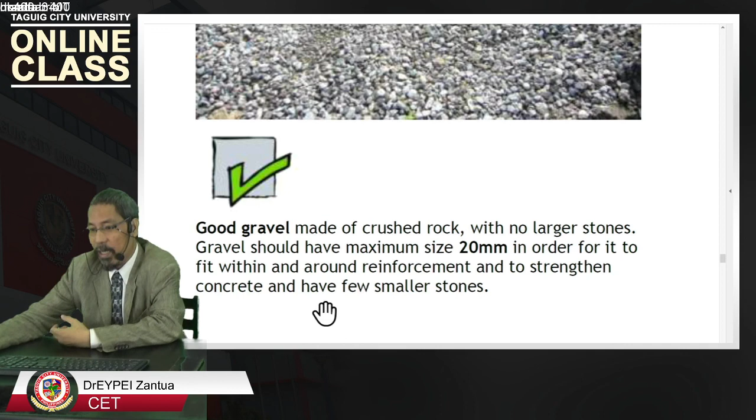So about maximum 20 mm is good. 20 mm is good, in order for it to fit within and around the reinforcement and to strengthen concrete and have few smaller stones. It's a good choice of size. Up to 25 mm can be done, but a good one is 20.

Mixing of concrete: good clean ingredients with limited water makes strong concrete. Ensure adequate cement is added, mix ingredients well, limit water, and use only clean water. Concrete should stand up when mixed, not flow away due to excessive water. Do not use any water that is salty. This destroys the concrete strength.

Do not use seawater. Use only properly selected clean ingredients. Because of what? Because of the amount of salt that would prevent the proper bonding. Okay? This destroys concrete strength. Okay?

Making columns. Strong columns provide strength to the building. All reinforced concrete columns should be made in one part before walls are built. They should not be made in small steps as walls are built. They should contain bars for wall ties and ring beams when constructed.

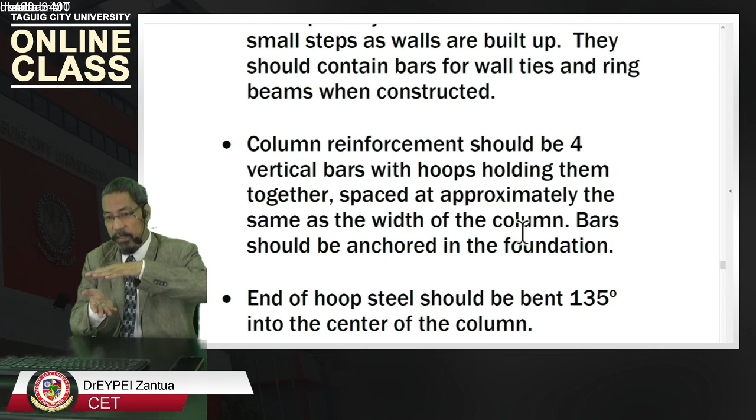Column reinforcement should be 4 vertical bars with hoops holding them together, spaced at approximately the same as the width of the column. Okay. Bars should be anchored in the foundation. Okay. Spaced at approximately same as the width of the column. So the smallest dimension of the column, so that is the what? The bars.

End of the hoop should be bent 135. So not just like this, but 135 like this. So like that. Okay. They should contain bars for wall ties and ring beams when constructed. Okay, so there must be a provision for the connection to the next element, for example, for ring beams and wall ties.

So do not produce columns in small progression. If it is possible, do it in one pouring. Okay? Do it in one pouring so that one beautiful homogeneous structure will be built.

Column steel must be covered with a minimum of 2 centimeters of concrete all around. So, what? Concrete cover. This is what we mean by concrete cover in our RCD subject. Okay? 2 centimeters. 2 centimeters is 20 mm, so that is actually the size of your gravel. So that's why gravel could easily pass through.

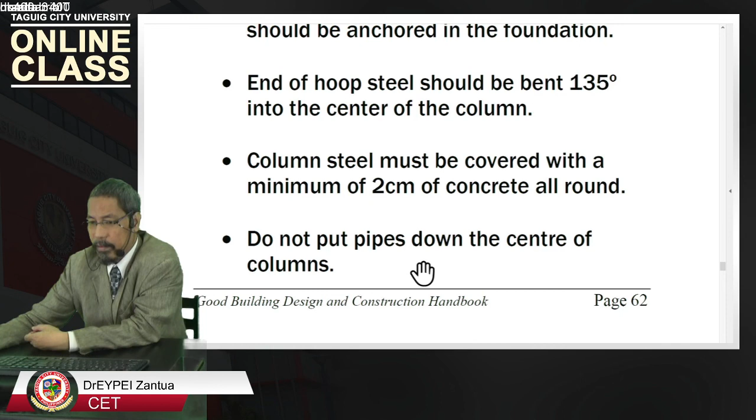Do not put pipes down the center of the columns. Usually the case also, but there are designs that would use that. That is not actually generally bad. But the pipe that we are putting at the center is actually plastic pipe, which is not good. For what? For plumbing system, for electrical system. We are putting pipes at the center of the column. So that is not good practice, okay?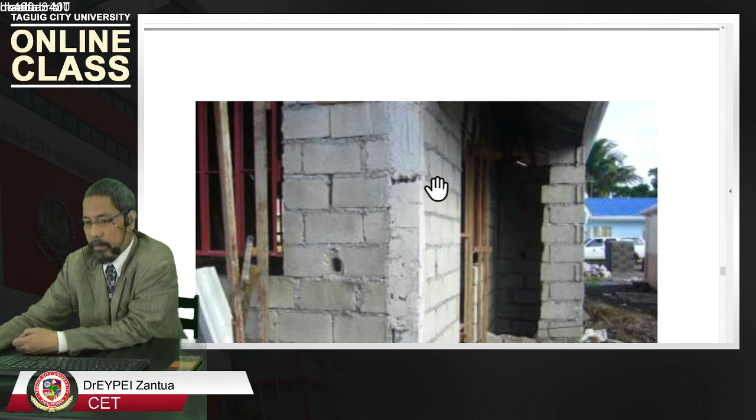The windows have been placed in the walls in a very weak way. All of this wall is weak and subject to collapse under stress. Okay? So, this wall, in this window, weak connection. Okay. That is how, because the steel cage was wider than the width of the bricks.

Okay, so because it's a very normal way happening in the Philippines, but that is a bad practice. End of steel bent at 135 degrees for earthquake resistance. So this is what we are telling you. So this bending looks like this. It's not 90 degrees, more than 90 degrees. This is 135 degrees, like this one. All of the ends are bent like that.

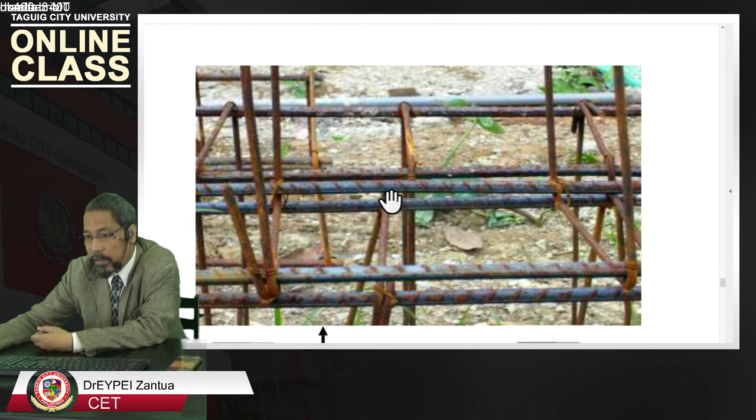Okay? So construction reinforcement strengthens concrete like bones in the body. Use of plain round bars is significantly weaker. So we have to use deformed and twisted deformed bars. So here, plain bars, and deformed bars. There are plain bars, round bars. Structural deformed bars, okay. But round bars, it's not okay.

They are mixed up because maybe the construction site is very far away from the hardware and they use the round bars just to proceed with the work. Without available stored material of deformed bars, they use the round bars instead.

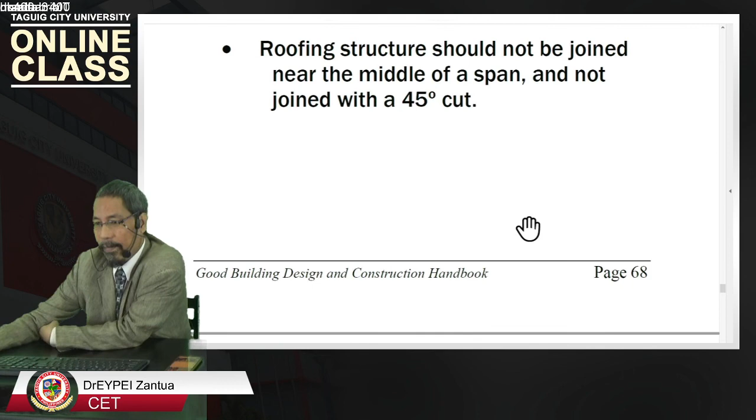Roofing: a strong roof provides lasting weather protection. Roof trusses of wood should be made with a triangular frame placed over columns and tied to them. Roofing supports for wooden trusses must be made of a block of wood rather than just a nail. Roofing structure should not be joined near the middle of a span and not joined with a 45-degree cut.

Okay, so the joining process. Here, with a block of wood, not a good practice: near, but not over the column. This should be right at the column, because it is going down, it will post load here. But this is very short. This is still okay, but they are not recommending it, and I will not recommend it either. Very short distance away from the column, but it's not very good.

It's not a good practice because this is a continuous beam, and this continuous beam will bend in a terrible way. And it's not long enough, not bent over the roof, so very small protrusion. So those are the mistakes. The connection between roof structure and columns is a weak building method. So next, block. This is good, using a block to support these purlins.

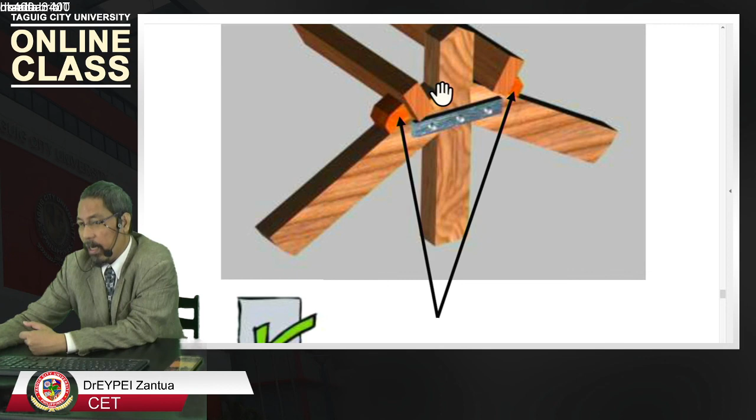Securing roof structure: do not use a single nail, which is a weak support and may corrode and cease its function quickly in the Philippine climate. Nails through the wood structure itself are also a weak support. You can nail it, but with support, better. Okay, very bad joining practice: 45 degrees and in the middle of the span.

It's connecting in the middle of the span at 45 degrees. Roof structure joint near mid-span with 45-degree joint. This is a very weak joint, not properly made, and it will gradually give way, leading to a sagging roof. It will not support workers building or working on the roof. Dangerous.

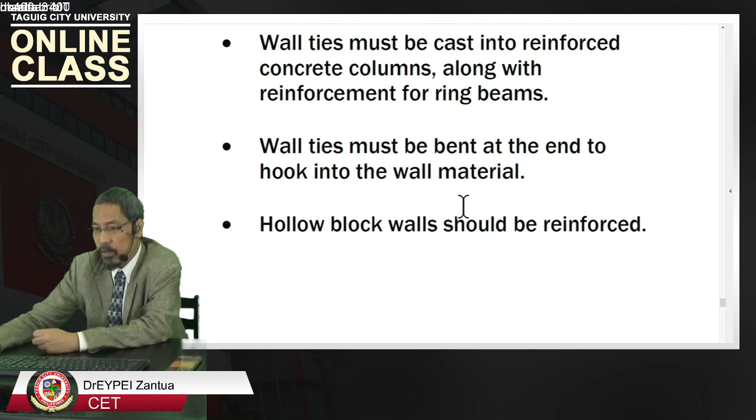Tying wall to the structure, how? Good connection. Wall ties to connect walls with the building structure are to be at regular intervals of 40 centimeters and extend from the bottom to the top of the wall. Wall ties must be cast into reinforced concrete columns along with reinforcement for ring beams. Wall ties must be bent at the end with a hook into the wall material. Hollow block walls should be reinforced.

Okay, so this is good, with the reinforcement connected there. Good example of how to insert wall ties into columns before they are constructed so that walls will be well tied into the structural columns. Again, reinforced hollow blocks. There is no column to wall connection. Hollow blocks have reinforcement, but I do not see column to wall connection.

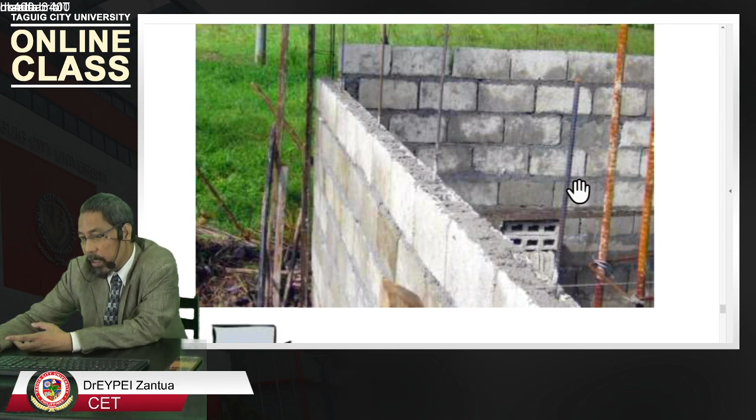Maybe later, no? Through the height of the wall, a reinforcing bar every 80 centimeters. 80 centimeters is the distance between this one to this one. Maybe 40, then 80, 80, 80, then 40, or less. This is concreted into the blocks throughout the height of the wall and is inserted into the floor or foundation when it is cast. It is a good practice to fill all holes in hollow blocks to provide further strengthening to the walls. Supposed to be like this, hook.

I do not see any hook yet here at the top, at the end. You see, so there must be a hook.

Wells, septic tanks, plumbing. These are the essential health supporting systems to a house. A well should not be located closer than 30 meters. This is the code, standard practice. 30 meters to the nearest septic tank, as per standard. If they are located closer, liquid from the septic tank may contaminate the well, which may bring disease to the users of that well.

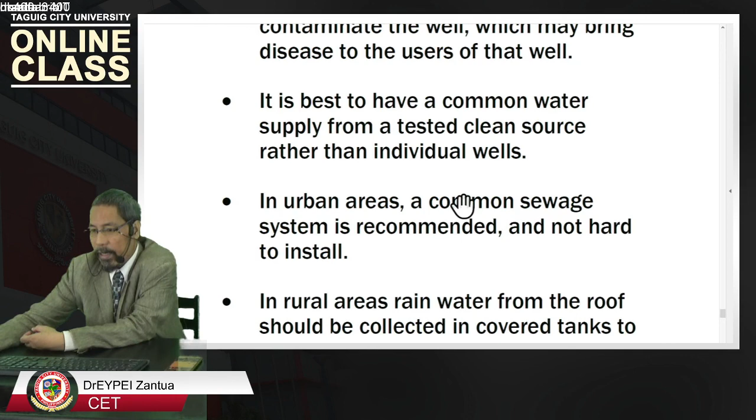It is best to have a common water supply from a tested, clean source rather than individual wells. In urban areas, a common sewage system is recommended and not hard to install. In rural areas, rainwater from the roof should be collected in covered tanks to provide a source of good household water. Bathrooms and toilets need to be well ventilated and to have a window.

Okay. Water collection facility. Drums collecting water from this gutter. So all of this roofing will flow water directly to the gutter, and the gutter is slanted with a small slope, 1% to 2%. 2% is a good slope toward this prepared tank. Good example, collecting roof water in tanks for household use. This water is freely available and is usually of good quality.

If many leaves are not falling on the roof, it is good, and there are no pets like cats and chickens running around your roofing. A screen at the entrance to the tank will filter out unwanted debris.

Code of minimum standards for house construction. So we are now talking about the standards, last 2 pages. Foundation must be designed specifically for the house in its location according to the size of the house, number of floors, weight of construction materials. Okay? The foundation ground must be chosen. The height of the water table must be observed because we may elevate the flooring. The possibility of liquefaction of the soil itself.

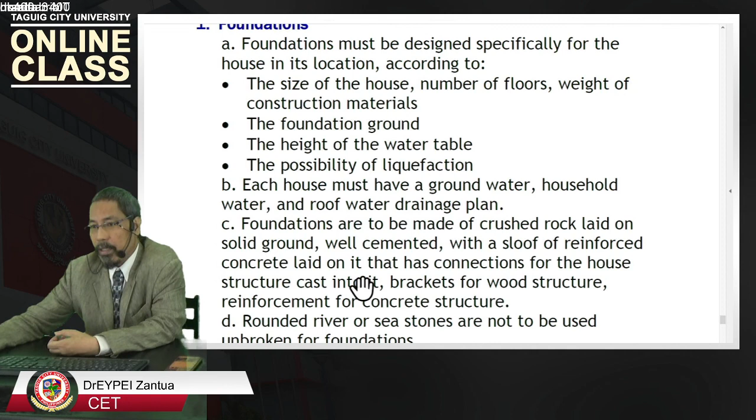Each house must have a groundwater, household water, and roof water drainage plan. Foundations are to be made of crushed rock laid on solid ground, well cemented, with a sloof of reinforced concrete laid on it, and has connections for the house structure cast into it. Brackets for wood structure, reinforcement for concrete structure. Okay? Rounded river or sea stones are not to be used unbroken for foundation. So we must break the stones.

House elevation consideration. So this is foundation, house elevation. House floor must be elevated above surrounding area with special consideration for flooding, either by groundwater, sea, or tsunami, storm, typhoon, and so on. Houses must be located away from places subject to landslide, where soil may move down a steep slope. Okay? Move it a certain distance away.

And building materials, number 3, sand must be coarse, clean, and without stones. Should not contain dust. Must never be coral sand. If it is from the seashore, it must be thoroughly washed first and contain no shell or coral fragments. Gravel must contain broken stones and not plain, rounded river stones. The maximum stone size for house construction must be about 2 centimeters. Water must be clean and free of salt and algae. This is for better bonding.

Concrete: no vegetable matter is to be mixed into concrete, no grass, wood, leaves, or roots. It must be well mixed. Use a minimum amount of water. It must be stiff. If the mixture flows like water, it has too much water. It must be vibrated or tamped with a round rod to ensure proper filling of the form and proper cover to all reinforcement. Okay? Tamping, with the use of a round rod. Reinforcing steel: deformed steel or twisted deformed steel is best for structural use.

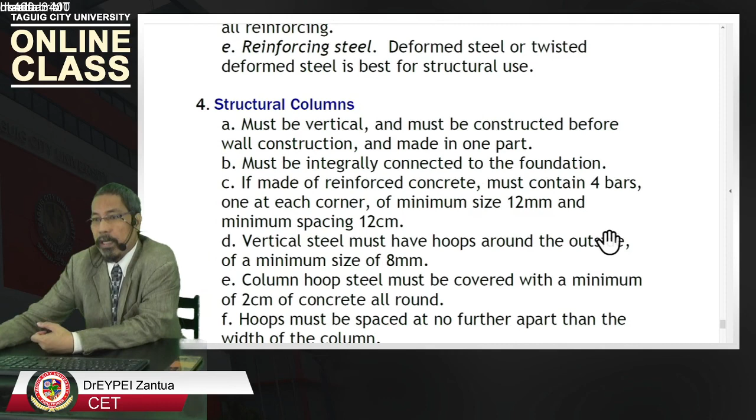Structural columns must be vertical and must be constructed before wall construction and made in one part. Made in one part, meaning the whole column is poured in one go. It's not by parts, one, then after 1 month another, after 1 month. It's not good. Must be homogeneous. Okay? Structural columns must be integrally connected to the foundation. Integrally, meaning the concrete and the reinforcement must be in good connection.

If made of reinforced concrete, must contain 4 bars, one at each corner, of minimum size 12 mm and minimum spacing 12 centimeters. 12 centimeters minimum space. Okay. If more, you can have 6 or more. But minimum 4 bars. Okay.

Minimum of 12 mm. Okay? Vertical steel must have hoops around the outside of a minimum size of 8. So, gano'n, ha? So, this is vertical steel like this, okay? 135 degrees. Column hoop steel must be covered with a minimum of 2 centimeters of concrete all round. Hoops must be spaced no further apart than the width of the column.

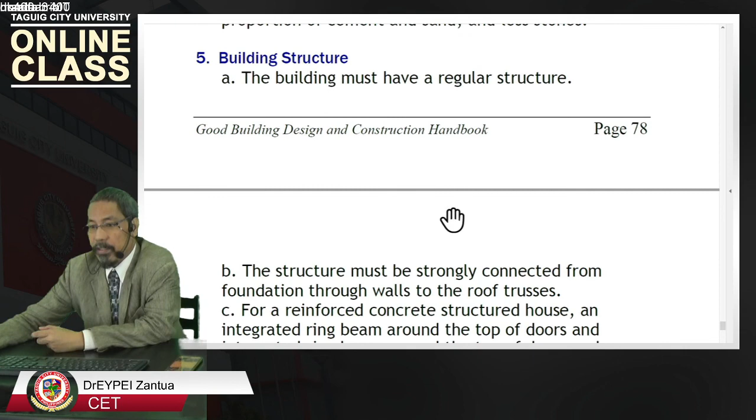Okay. Building structure. The building must have a regular structure. Structure must be strongly connected from foundation through walls to the roof trusses. For a reinforced concrete structure house, an integrated ring beam around the top of the doors and windows must be connected between and into the columns. So, ring beam, top of the doors and windows. Second, the reinforced concrete beam must be connected at the top of the walls with the columns. So at least 2 ring beams.

Ends of the hoop steel must be bent 135 degrees as shown in the handbook. Triangular gable end walls of the houses must be structurally supported. For a wood structure, wood posts must either be connected directly to the foundation or, if above stub walls, must be securely bolted to the metal bracket connected into the stub walls. So metal bracket with the stub walls, okay, connection. So complete connection must be observed.

Tying wall material to structural columns. Wall materials must be tied to the building structure with metal ties. Metal wall ties are to be hooked at the end. All wall openings are to be tied to wall materials. For reinforced concrete frame buildings with brick walls, ties are to be cast into columns at 40 centimeter spacing and are to be a minimum of 8 mm diameter.

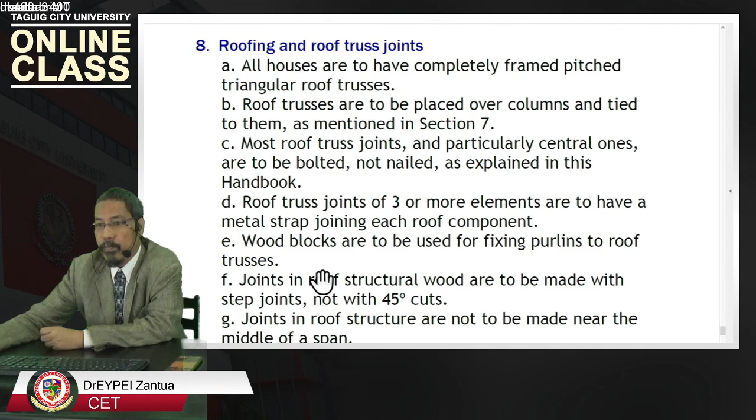Most roof truss joints, and particularly central ones, are to be bolted, not nailed, as explained in this handbook. Preferably bolted. Roof truss joints for 3 or more elements have a metal strap joining each roof component. Wood blocks are to be used for fixing purlins to roof trusses. Joints in the roof structural woods are to be made with step joints, not with 45-degree cuts. Strapping of joints. The jointing connection is not 45 degrees.

Joints in the roof structure are not to be made near the middle of the span. Okay. Take note of that. If you have to connect one element to the other, do it in other areas, not at the middle of the span. Cross-bracing of walls and roof. All wooden parts of the house structure are to be cross-braced: stumps, walls, and roofs. Wood roof structures are to be cross-braced in both directions. So cross-braced in this direction, like this.

Drainage. A comprehensive drainage plan must be part of the house design and must include drainage of ground water and household water, as well as of roof water. All drains must have a constant flow towards a common drain. Drains must be covered, with bridges for access across them where needed. The bottom of the drain should have a V formation to minimize water accumulation due to improper fall of debris in the drain.

Well and septic tank. No well is to be constructed closer than 30 meters to the nearest septic tank. It is strongly recommended that a common water supply from a tested clean water source be provided for a cluster of houses. For clusters of houses, and particularly in urban areas, a common sewage system should be provided. For rural areas, however, rainwater from the roof should be collected and can be used as needed.